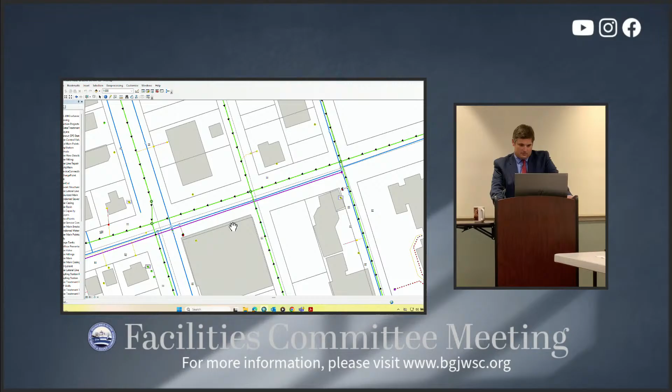And so that was... well, this isn't labeling. Where's my labels at? Stop that. Label. Okay, so 4,250 and 60 here. Let me turn on the orthos. Oh, stop that.

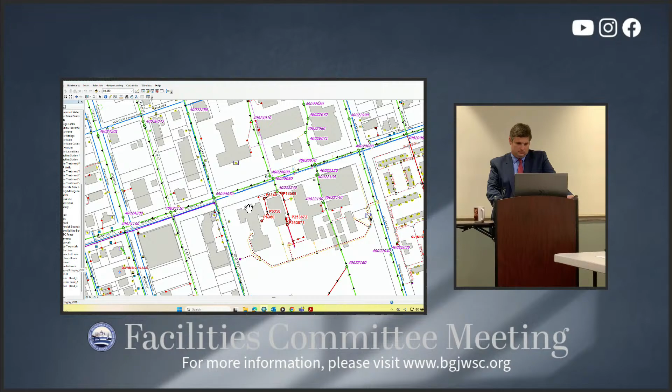Do you and other members of staff have confidence that they can do this? Yes, they can absolutely do the work. They've done a lot of high quality work for us over the years. They did a section of line over on Sea Palms West by 2032. They were there for months on end and got that job done. The work can be done.

I think there's a combination of things. The lines are taking longer, and again, when you have to get them clean to the point where you can reinstate the laterals, it requires a higher level of cleaning, which does come at a risk. And I don't think they bid the job appropriately for that. So that's what I was going to ask. You think that they just underbid it because they didn't do the due diligence? I think that was a part of it. And also, when you're having to get multiple crews down here that you weren't planning on getting down here.

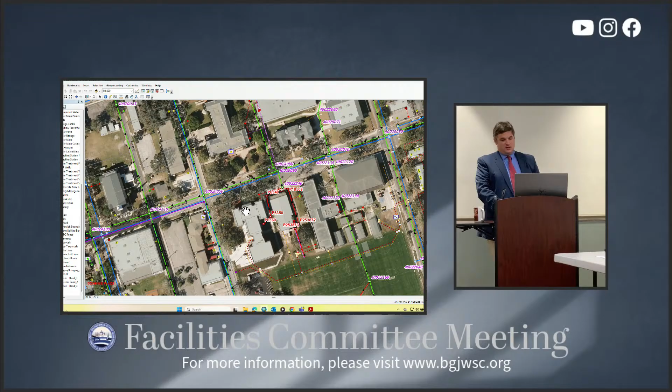So this line here is on Mansfield, 50 to 60. This is by Glynn Academy. So you've got these lines in this general area here. And what size are those? Those are, hang on, I think those are 24s, but they may be 15s.

And they set up bypass lines while they're doing this? Yes, because it takes 24 hours to rehab a line. So this is a 24-inch ductile iron line. And then, wrong one. And then, so the 15s are, let's see, 500 to 510, no, 2,500 to 2,510. So how many feet do they have left? If this is descoped, they've got about 3,000 feet left. If these are included, it's about 6,000 feet left. Out of how many feet? 26,000.

What's the life expectancy of those lines left? The rehab lines, you're looking at 50 to 100 years. The ones that are in bad shape now, we've talked about multiple ways of doing this. They do need to be rehabbed. They're in terrible shape. So we're either going to have to try to line them, and unfortunately you're looking at $200,000 to clean them to see if they're lineable, or you're digging and replacing. We talked about pipe bursting, but in downtown you have so many laterals, you're going to have to dig every single lateral if you pipe burst it, so you might as well just open cut it and dig it. It's going to be very costly to dig these lines because they're in the middle of asphalt.

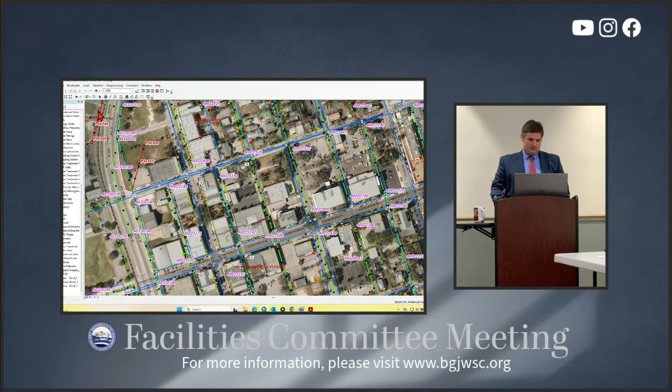This is Gloucester and Reynolds, and this area coming up F Street here. This is the court, all these lines by the Pate Building and the courthouse, those are the lines we're talking about. And you're not going in and digging and replacing it in one day.

But we had a unit price for them to do this work, and now they say they can't do it. They said the lines are not conducive to lining. They don't think they're in enough shape, good enough to actually line them. They're concerned, which I understand.

They're concerned that if they clean the tuberculation off enough that they can line it and reinstate the laterals, the pipes are going to collapse. If they don't collapse while cleaning it.

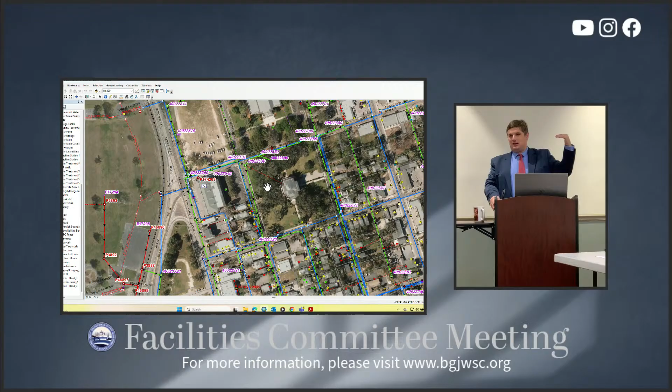Because a lot of these older lines, when they have major tuberculation, we'll just clean the flow line down, and it's not as big of a deal, because you're not messing with the top of the pipe too bad. But with those laterals coming in, and a lot of those old laterals downtown are coming in more, not at 9 o'clock, they're coming in at 10 or 11 o'clock. You got to get the whole pipe clean.

And when you start cleaning the top of the pipes, they're worried about sinkholes showing up and the collapse happening. If a collapse happens, it's not like it's going to cause a major issue as in sewer going everywhere. The pipe will still be flowing through the bottom. You're going to have a huge sinkhole open up, and you're going to have asphalt in the pipe and everything like that at that point.

You'll have to bypass it, dig it at that point, and you'll have paid $100,000 or $200,000 for them to clean it, only to have to dig it at a later date. Do they get paid if that happens? Yes, they get paid extra for that, don't they?

If it collapses, they have a point repair price, but the point repair price was not intended to replace manhole to manhole.

15 and 24-inch pipe's probably going to be somewhere in the ballpark of $300 to $400 a foot to install plus asphalt. So you're probably looking at somewhere around $500 a foot by the time you're out of that work. And $500 a foot at 3,000 feet, that's $1.5 million to replace these lines.

Are you saying to do a change order then for this, or bid it out separately? I think at this point in time, since we already have a contractor on site, he's gonna get 20% just doing a change order. He's gonna hire somebody to come and do a conventional dig or a pipe burst.

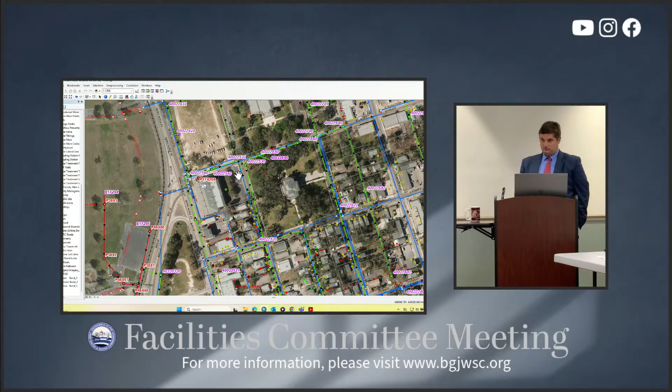And at this point, if you bring in an additional contractor, I think you'd be better off de-scoping this and rebidding. I agree. And what we could do, I'm not saying this is the ideal scenario, you could bid it, provide the videos and say, does anybody think you can clean and line these?

You could do that. You could bid it for pipe bursting and then just digging down on the individual laterals, or you could bid it as a full replacement and just get numbers on all three of them. I'm not saying it'd be ideal, but you'd have a comparison of all three options. You could bid it out and just see what you could get back.

Now, if we do have to dig down, whether it's laterals or the whole thing, some of these areas are going to be very challenging to dig. If you're digging Reynolds Street between the Pate Building and the courthouse, there is no good time to do that. The lines down Mansfield on Glynn Academy, you could do those during the summer. It won't be great, but you could handle those. But Reynolds Street between Pate and the courthouse never doesn't have traffic on it.

Not saying the county won't work with us on that, but it's going to cause major disruptions to county business when we do this project if we have to dig these lines. That's why we try to do them trenchlessly.

We can put that in the specifications so the contractor knows he will have to work within the county schedule. There might be certain days they can't work. The only days it makes sense for them to work are Saturday and Sunday down there, and if you're only doing it two days a week, it's going to take months to get these lines done.

So the smaller pump, when we talk about a jockey pump scenario, the smaller pump will run almost continuously without cutting off. The larger pumps will come on, they'll run at least once a day to make sure they're going to fire, but they only come on when we get to a certain level in the station.

So 2030 is back here on Stranger Cemetery Road. Do we have a picture of that station? Yes, hang on, there's a hyperlink. I don't know how to get to the hyperlink. It's outside, above ground. You know where that one is, Mike? Yes, sir, right next to the one I rehabbed in 2016. Okay, so you know what they're talking about.

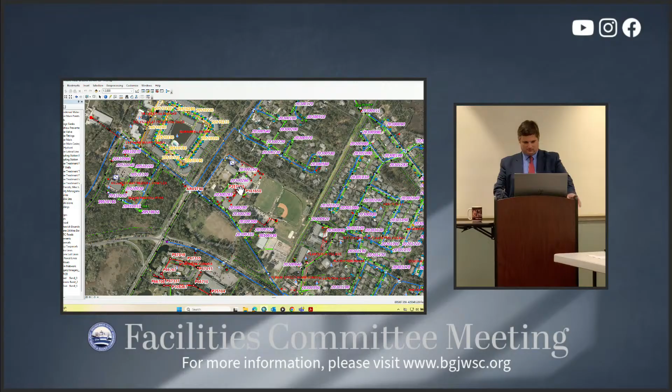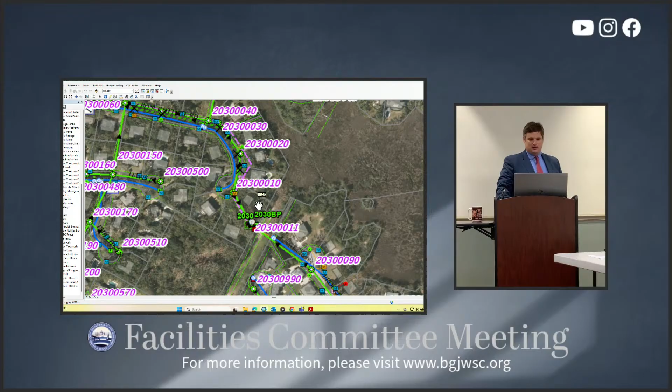Matter of fact, I think I raised the question about the pumps at that time. So 2030 is back here at the back of Hamilton Landing on Stranger Cemetery Road, back behind the Georgia Power easement.

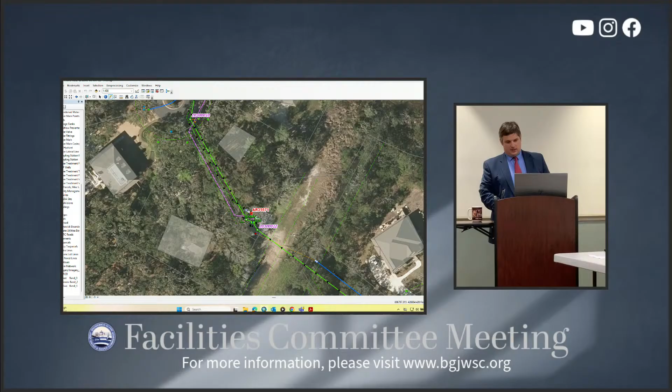What happened to those pumps? What caused the problem? Those pumps are having a lot of motor issues, and we think it's because they're starting so much, particularly in the middle of the night. They'll come on, ramp up, and immediately cut off because they overpump in the middle of the night. So we have 3 of the 4 pumps out of the hole right now needing repair.

Could you change that to a timer at certain times of the day? That wouldn't do it? Operated at different levels depending on time of day? I mean, you could, but then when it started raining, you'd have real problems. But have it override if it... I will say this, anything is possible, but the more complicated you make it, the more failure points you have.

So we have 3 pumps out. There is a bypass pump there, a permanent bypass pump, and one in the hole, so we're not having problems at the station. But to rehab the 3 pumps is going to be $45,897. And to buy 2 KSBs for the primary, the larger pumps from Pump and Process, and 2 jockey pumps, the smaller pumps from Sulzer, is $27,933 for the KSB, $18,687 for the Sulzer. So you're essentially spending the same money to buy 4 new pumps as to rehab 3 pumps.

So the request here is to buy 1 pump for 2003 from KSB, 2 pumps for 2030 from KSB, 2 pumps for 2030 from Sulzer, and 1 pump for 4119 from Sulzer. And the total is $78,901 to Pump and Process and $51,697.50 from Hydra Service. We can certainly go through the repair quotes and look at pump curves should you like to.

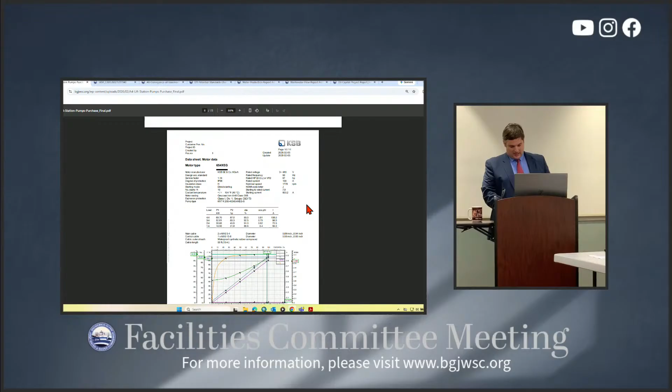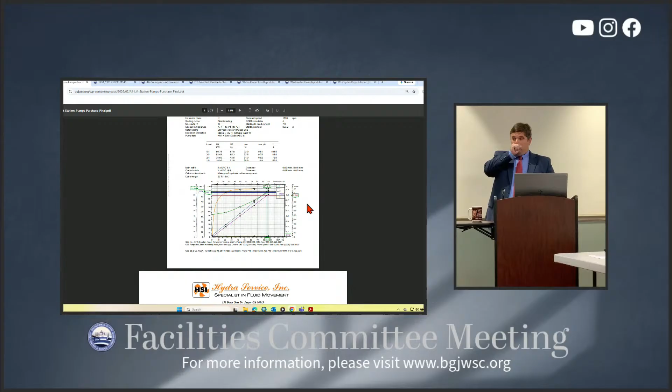So we're replacing all of the pumps in 2003? In 2030, not in 2003 — replacing 1 pump in 2003, all of them in 2030. 2030 is the one behind Frederica Academy. It's 5 years old. 2016, it's 10 years old.

Time flies. Believe me, I have an 8-year-old, I understand, time flies. She's supposed to be like 4.

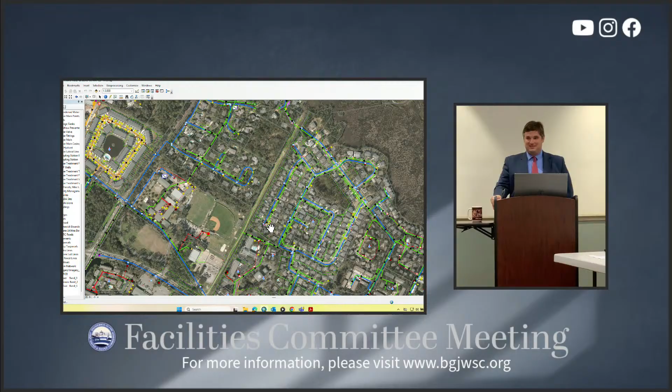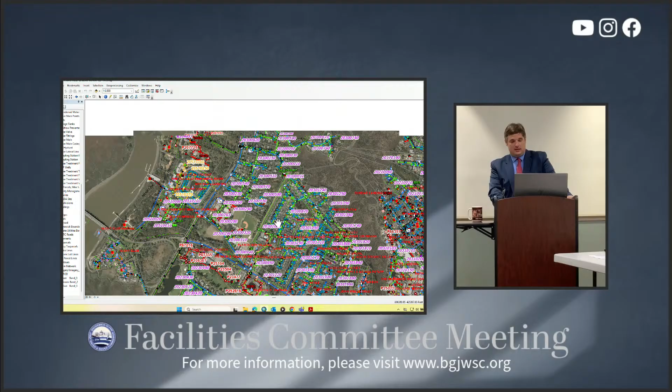The pump should last 15 years. They should, yes, sir, and none of these pumps have. They were Flygts that were in the 2030, and they have not worked out. The Wilos that were in 4119, one of them is being replaced. We're not really buying any more Wilos right now. And then the Grundfos we put in 2003, we probably won't be buying a whole lot more of those either. So we're trying to shrink down on what we're using. We tried some different pump manufacturers, and it hasn't worked out for us. Flygt, we do like their pumps, but their prices have just gotten uncompetitive.

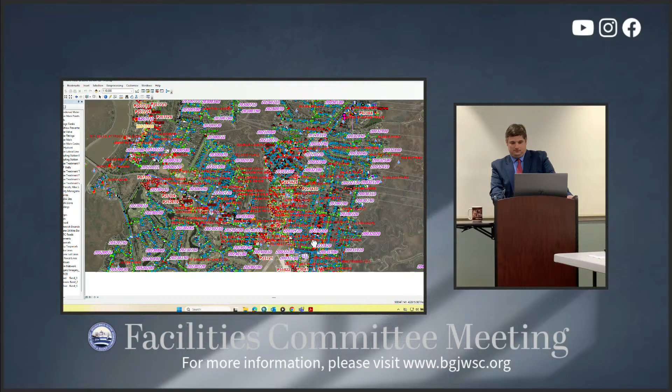So speaking as truly the only layman on this board, were the pumps under capacity? Or are there just faulty pumps, or?

Well, it depends on the situation. At 2003, the Grundfos, we have had repeated problems with the cables. The cable that comes into the top of the pump keeps having nicks and cuts. So there's got to be something with the way they're wrapping those cables that they're not durable enough for those setups. The Wilos, we're having motor problems, and the Flygts at 2030 are having motor problems. Typically, when you have motor problems, one of 2 things is happening: the pump's ragging up and pulling more amps causing motor problems, or — which is the case at 2030 — it's just starting and stopping so much. You don't want a pump to start too often because it's kind of like your vehicle; the more times you crank it, you're going to wear the starter out eventually.

Don't we have an elapsed time meter and all that in our records? We do, but I don't have that information right now. But we do have it to compare with other pump stations. Yes, sir, we have all the run times and everything like that. Yes, sir.

I mean, I can pull it up, well, I can't pull it up from here. I don't have the link. So if I could get David to send me the link, I can pull it up from here.

Did we have a motion yet?

So in 2030, though, we're talking about using two different size pump horsepowers to alleviate that problem. So the smaller pumps will basically run 24/7, except as part of the programming, we'll cut them off and start one of the bigger pumps, say once a day, to make sure that they're going to pump. It also helps flush everything if there were any velocity concerns. And then if it gets to a lag pump, it will turn on the higher pump and pump it down.

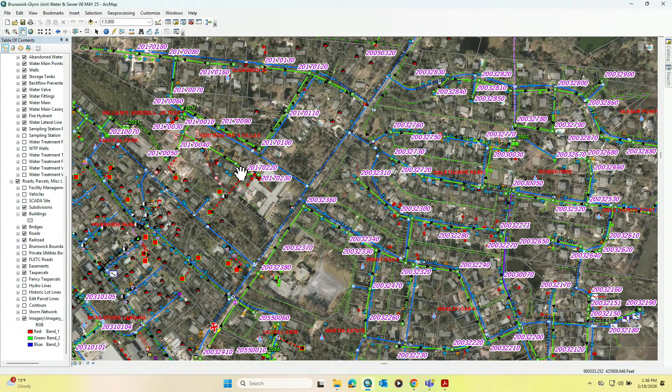No, we'd be better off to buy the new pumps. Yeah.

And Xylem has priced themselves right out of the market. We talked to them, indicated that they needed to sharpen their pencil, and they came back and it wasn't sharp enough.

You can typically buy two pumps from other people for what they're charging for one. KSB, Xylem, they're pretty comparable. And like I said, Sulzer, I used a lot of Sulzer pumps where I was at in Alabama. We've started putting them in our system. We've had good success with them. They're good pumps. Buford Jasper has started almost standardizing on Sulzer pumps as well.

So they are really taking a huge share of the marketplace. A lot of that's because they're a lot more competitive than Flygt has been, so a lot of people are turning away just because of the cost. And they're servicing their pumps there. They got a shop in Darien that can rehab the Sulzers. Hydro Services has got a place in Darien now, and we've been getting really good customer service out of them.

Can I have a motion? Yes, sir, I'll give you a motion for that one. And that's item number 4, lift station pumps purchase.

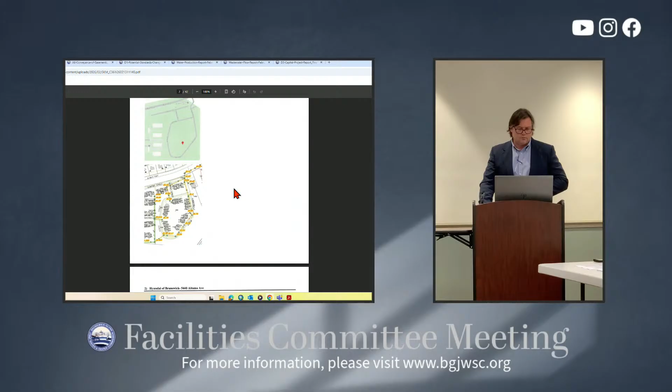Second item is off of Altama Avenue, Hyundai of Brunswick, a new facility there, auto dealership. On site, most of the infrastructure is privately owned and maintained, but there is an extension of sewer and also an extension of water across the fringe of their property, paralleling Altama, that we now have obtained or will obtain easements over as they work.

We got the dedication of the infrastructure last month, right? This is just the easement for Hyundai? This is easements, correct, easements.

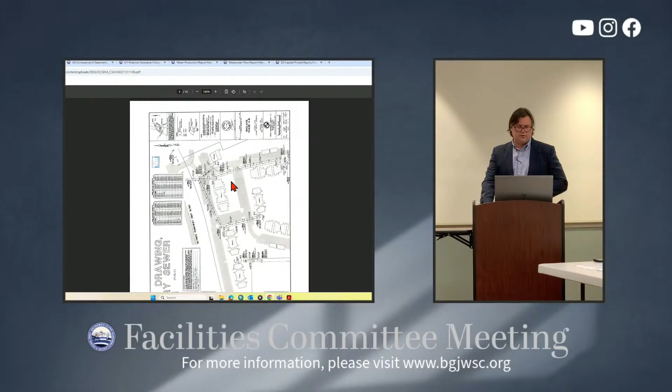Those are the two items. There are record drawings for each. Correct, so the infrastructure was already there within these easements, that's why we're getting these easements here, cleaning up our record, so to speak. It's not uncommon. We do have infrastructure out and about the county where we don't have an easement. One was never pursued for some reason, and this helps us clean this up. That's exactly what this is.

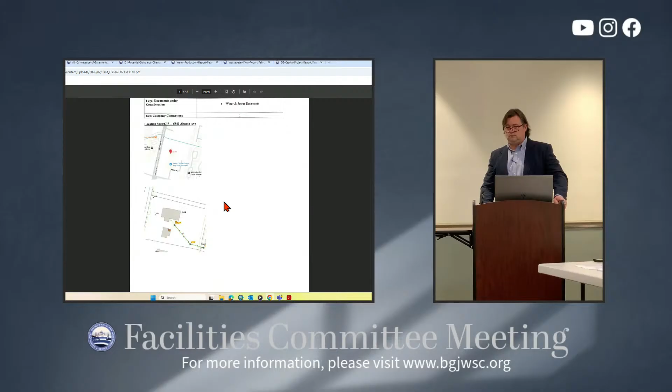Questions? Hearing none, can I have a motion? I move that the Facilities Committee recommend the full commission approve and accept these requests to accept infrastructure and easements with associated documentation as applicable. Second? I second. Motion seconded. All in favor? Motion carries 3-0. All right, thank you, Commissioners.

Todd, tell the commissioners what happens after we do that. It goes on our records, and the estimated cost goes into the financial statement, right? Yes, sir. It goes as a capital contribution on the balance sheet and then starts being depreciated. Right, correct. And legally, the next step once the Facilities Committee advances it to the full commission and they accept, we take these documents and have them recorded at the courthouse. Then once that happens, we bring them back and update our mapping in GIS so that everybody, including anybody who looks at the county's website for GIS or QPublic, tax assessor, all these easements will now show up everywhere.

All right, thank you. And then legally, does that come off the tax digest? It does not? It may lower the value of the tax digest, but it doesn't come off because we're not full owners of the property. Gotcha. Correct, yeah. Thank you.

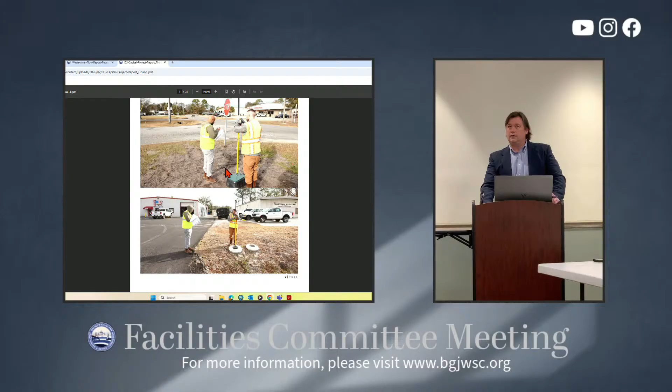Okay, all right. Let's see, I think we got a few overhead. How many people are tied onto that system now? We are working to get three actively tying on right now, but as far as who's discharged to us right this moment, nobody quite yet.

We've got one new development at Habersham, another electrical supply house over there, and one other interested party we're talking to, trying to get them tied in. Do we have grinder pumps in each one of those? They will have to have them, they got it first, they have to put them in, and they have to furnish the wet well for it and everything. Yes, sir.

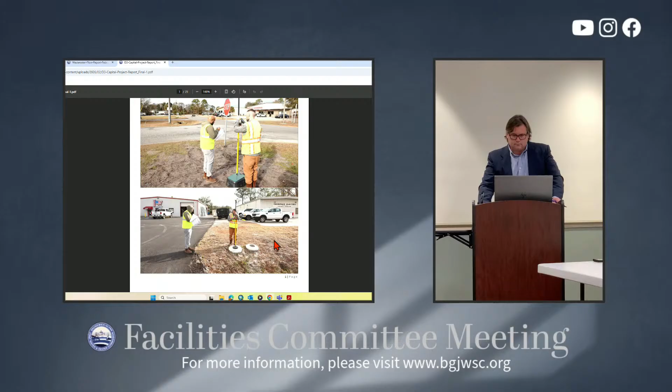All right, good overview shot there. Community Road area, lay down area. This is the section on Georgia Power's property, I believe.

That project's wrapping up. Getting that easement, if we're able to secure it from Georgia Power, saves us from having to bore underneath Community Road. We can go into what is an existing private leg of gravity that just serves Georgia Power but connects to our system on Benedict. We can pump into that system, take over that gravity section from Georgia Power, and then we don't have to bore under Community. So we might not get the full width easement we typically get, but it's a good concession to not have a line under Community.

This was a project you may recall that started out looking at doing gravity out here, and then it morphed into this in the design process. A lot of good ideas came about, some contractor driven, some opportunistic like the Georgia Power easement, different ways to make it a better project in the end. So I think we're in it with a really good product.

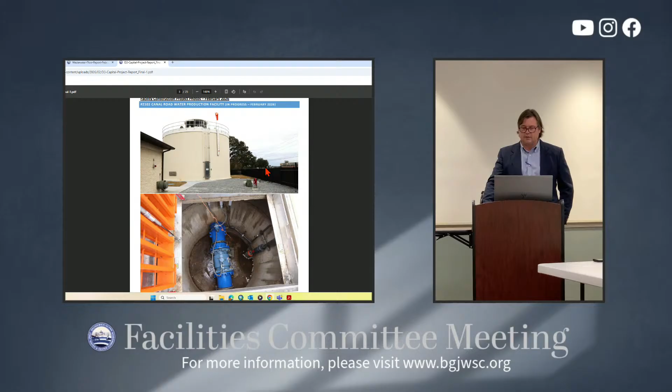If you've been out there in that area, Glynn County has their traffic circles complete now, working very well as far as I can tell. We are off to the side over there in the road. Harry Driggers, which once went right beside it, is now closed off, and there will be a deductive change order coming in March to close this project out, about $300,000.

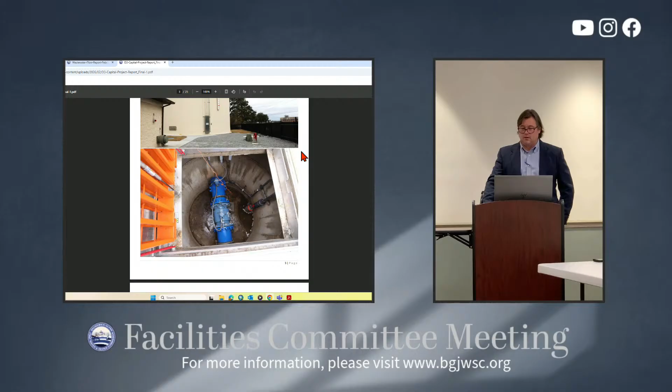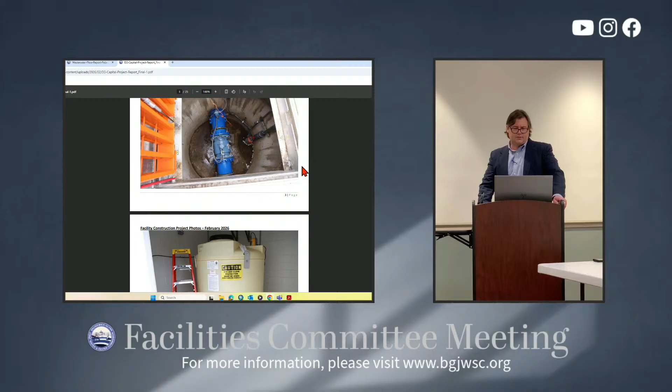Tells us how much water we're putting out to the system. Chemical feed tanks—that was one of the lingering items that finally got remedied there. There's a picture of it from the side looking at the hill behind it. But it's a nice looking facility.

Now functionally complete and just the paperwork. We do still need to get record drawings back from our engineer of record on this one, Thomas and Hutton. They're working on that, and then we'll close out the engineering contract as well.

I had no idea they were gonna wrap Harry Driggers around that from the roundabout, but it looks good. Well, it was interesting—we were doing this project, and the county was doing their major project out there. Nobody knew we had anything going on because the county had everything graded out, and we were just in there kind of doing our thing quietly. Then all of a sudden the tank started being built, and they're like, 'What do y'all got going on over there?' It's a good thing we got a private road. Yes, we have a private entrance, plus we got good visibility.

All right, next project is Dunbar Creek. We mentioned they got the pump skid started up. There's a few minor punch list items they got to get taken care of, most of those SCADA-related. Then we're trying to finish up the permitting—we got to have a public meeting for the EID, and then we'll get that closed out. But doing very well. You got a shot there.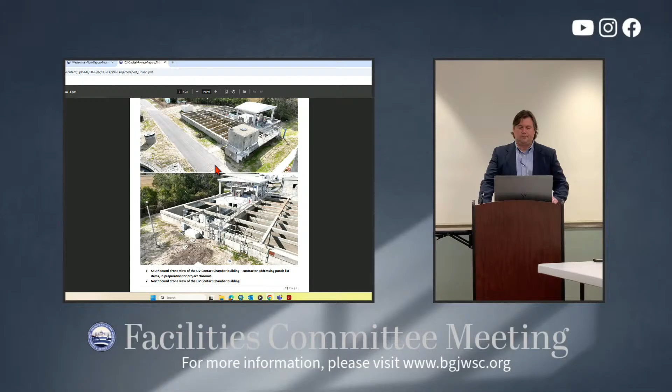So that one's almost off our list as well. The UV system is operating very, very well down there at this point. Good to see that project nearing completion as we're fixing to start another major project down there with the clarifiers.

All right, here we go—Exit 42 elevated storage tank. First picture here, you can see they used a lot of concrete placement. This is actually one of the testing protocols they do there, called a slump test. Pretty interesting.

That's gonna be visible then, won't it? Very visible. Can you explain a slump test to us? In the most simple terms, it's how watered down your concrete product is. There's an ideal water content depending on what you're doing with your concrete and the type of mixture. The sloppier the concrete, the lower it's gonna slough down; the less water there is, the stiffer it's gonna be. When they turn and invert that cone out, they see how it literally slumps down. It's a very simple measurement, but it gives an indication of how watered down the concrete mixture is.

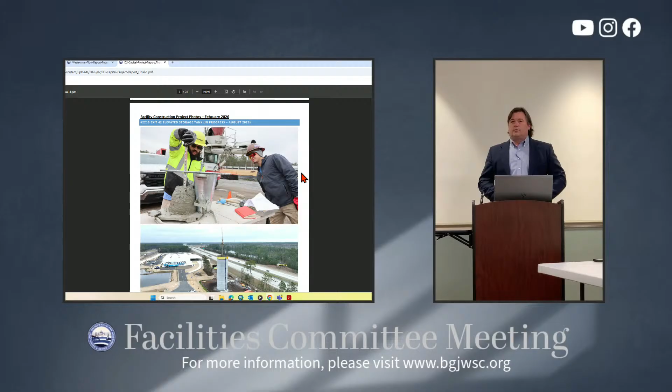But yes, to your point, sir, it is highly visible right there where they're working because the adjacent properties have certainly increased the visibility of our site as a result. And everybody, of course, is looking at our beautiful elevated storage tank and not at Buc-ee's as they drive by.

Exactly. They're looking at our tank, I'm sure.

It's real accessible. The roadway here, if you go out that way and come down the exit, cross 99, this is all open public right of way now. I think Glynn County is going through the process of accepting this publicly, but it's all open right now.

You can drive right up here if you like. Buc-ee's has that exit now sign. They do? We could change that and just put an arrow and say 'new water tower' with an arrow going over. That's right.

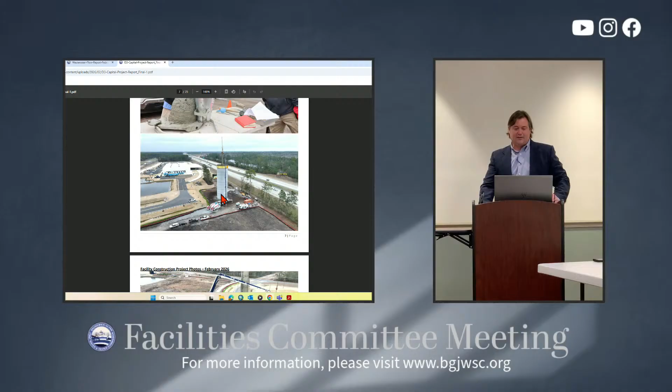So, very visible, and we'll talk about another one here in a second. There's a good view from there of placing concrete.

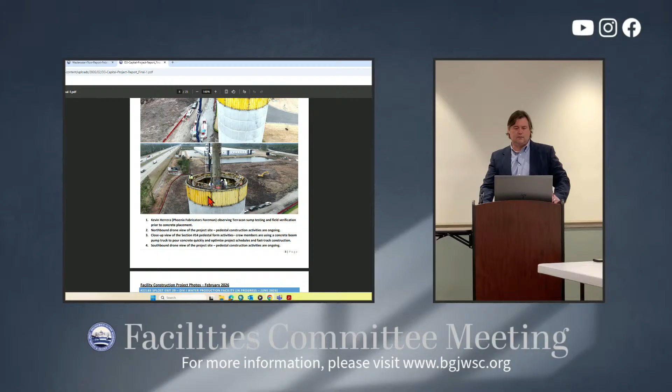The forms, you can see the yellow forms. One difference you'll see between this exit 42 concrete finish and the one down at exit 29 is that it's different.

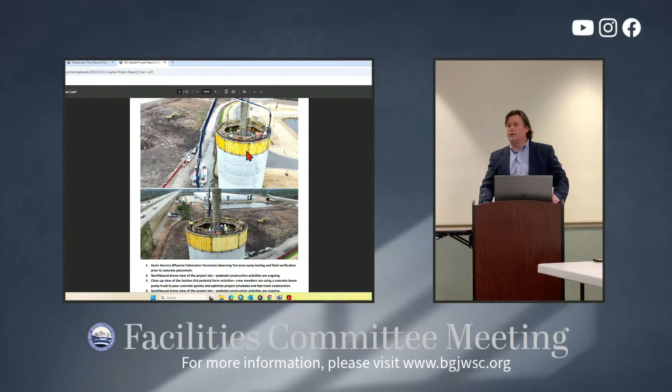They're using steel forms here, so the finish is very smooth, it's slick. The one down at exit 29 they're using plywood or wood forms, which gives a little bit rougher finish. Neither one's better than the other, it's just interesting that it gives a different finish.

All right, now down to exit 29, Division 1 Water Production Facility at our Southport Treatment Plant. That's the entrance road going into the plant site. You can see the new elevated storage tank there in the distance.

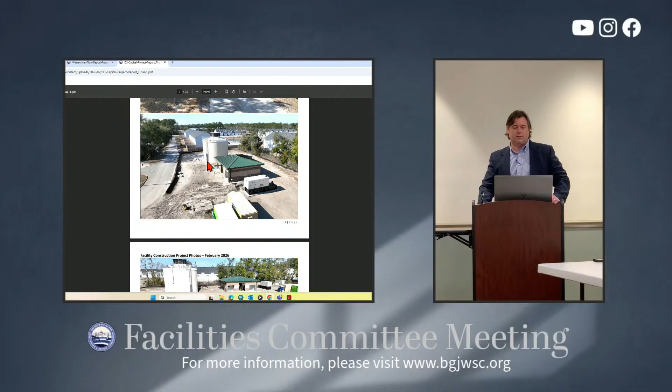Here's a view looking back to the west of the site. The green roof there is our new water production facility, with the generator sitting beside it and the ground storage tank in the background. Coming along nicely there. Another shot facing northward.

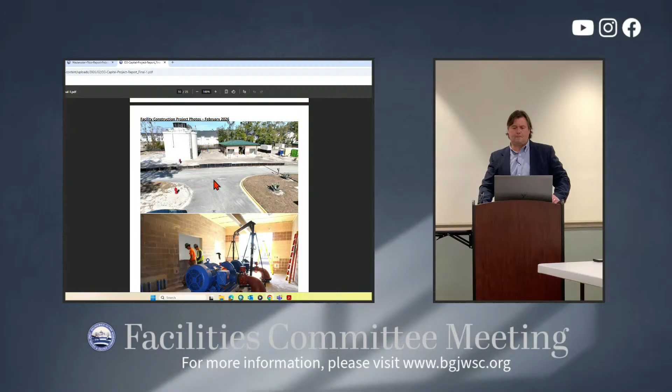That's inside the water production facility with the high service pumps. Typically you'll have two pumps in there, high service pumps.

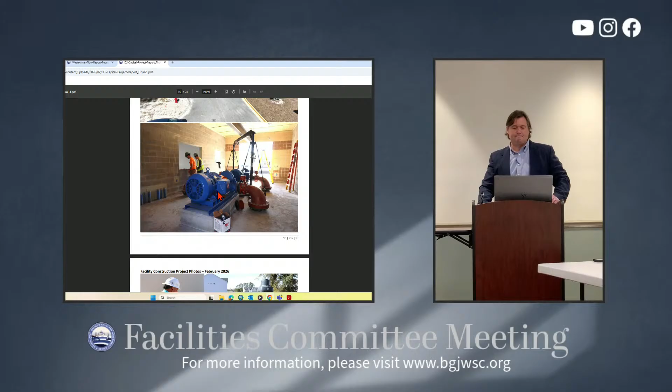Site Superintendent Mr. Art there, making sure everything's going fine with the connection to the existing well. Just a reminder, we did reuse an existing well there. The well was in good condition.

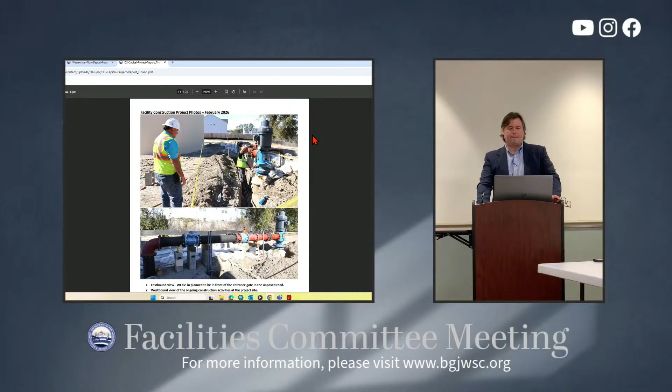Division 2 of the Exit 29 improvements. Just a reminder, that project and the next two projects are all SPLOST funded, so all that Exit 29 work is funded through the SPLOST referendum.

What about North Main? That's bond funded. Right. So, yeah, SPLOST for Exit 29, Division 2.

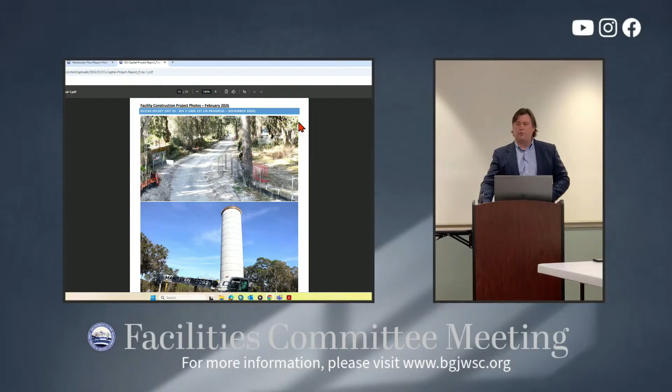It's our 500,000 gallon elevated storage tank, and that's the one poking up out of the trees you can see. You can definitely see it coming on the interstate, especially when the crane was on top.

The crane's been down for a bit because now they're placing concrete for the dome, or the cap, the support for the bowl at the bottom. I enjoy this view every morning as I come into work on Highway 17 across the Little Satilla River.

I can see beautiful tanks sticking up out of the trees now, it's just a landmark. Once we see the bowl on there, it'll of course be even more prominent.

And what are we going to use the concrete area for, since there's no water in that? Right, there'll only be some pipes going up through it, so what are we going to do with the space at the base of both of those tanks?

We don't have anything specific outlined, but our other pedestal and composite tanks end up being storage areas. We house the electronics and stuff for the tank inside those as well, but we also use them for general storage. You just can't store anything that contains fuel in the tanks, but everything else is good to go.

And you never have enough storage.

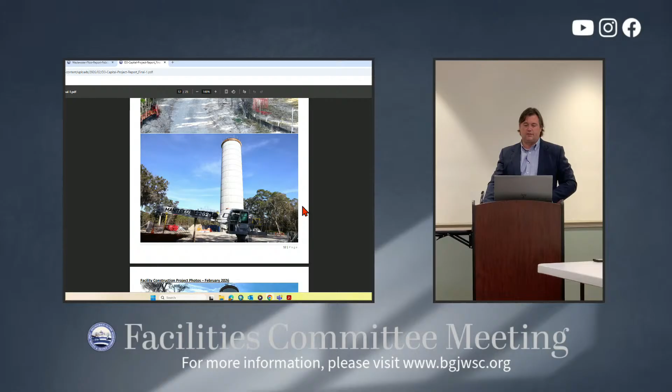Yeah, each one will have a roll-up or garage door at the base of it. I'm going to put myself a cot in there for storm season. That'd be good, it's right around the corner. Exactly, close enough by the house. It'd be nice.

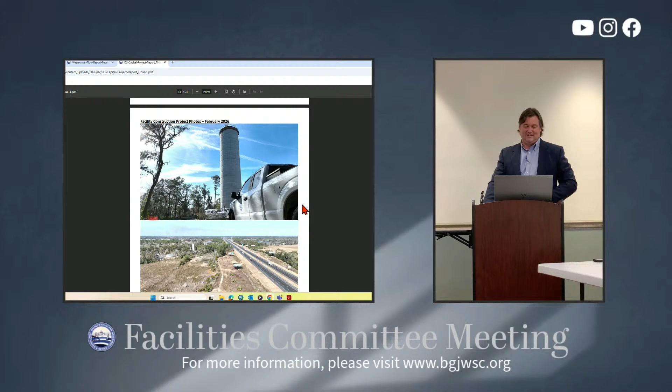Another good view there, and here's a UAV view. Basically you're looking directly below the drone. Here is the Little Satilla River facing northward, where our outfall to the plant is, and you can look forward and see the tank peeking out from behind the trees as well.

When that bowl gets on there, it's going to be about 170 plus feet tall total, so it'll be a lot taller once it's complete. Which one's going to be taller, that one or the other one?

They're essentially about the same, though of course the overflow elevations were a little bit different. This one's based on the Brookman tank, which is about 10 miles to the west on Highway 82.

And the one up at Exit 42 is based on the Kate Road tank and the other tanks in the area, the North Mainland tanks as well. So, very similar, all around about 170 plus feet tall.

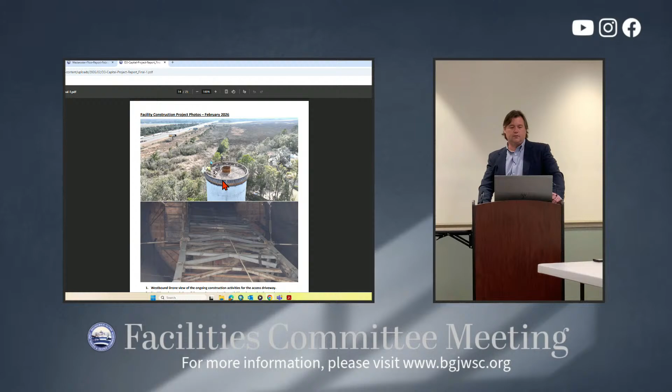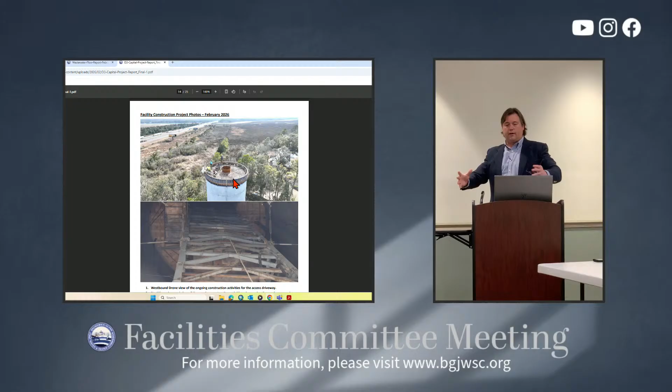There you go, and there's another good view from the top as they're placing the reinforcement for that dome cap we talked about. They are going to cap it with concrete, and then they'll start placing the prefabricated and formed steel, welding that in place. They'll start welding the bowl on the ground, then lift the whole thing up and weld it together.

Pretty interesting process here. It'd be good if we'd had a time-lapse construction photo. We talked about that, yeah. Could've done that, couldn't it, with the amount of photos we've got now? Staff has taken a ton of photos and video. We could piece something together.

It was talked about, should we have a post with a camera that takes a daily picture or something? Would've been nice, yeah. Trying to cut costs where I can, sir. Yeah, you said we can still do it. We can take and mock it. It won't be a daily picture, but we can get something close. There are some good videos on YouTube that do show time lapse. But they're not ours, no. Same style of tank though, and it shows a pretty good description of how they're built.

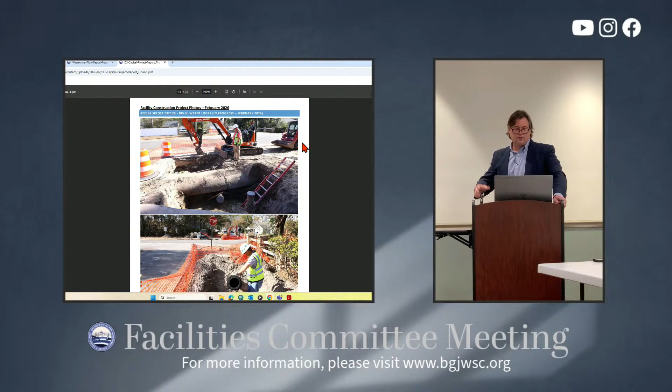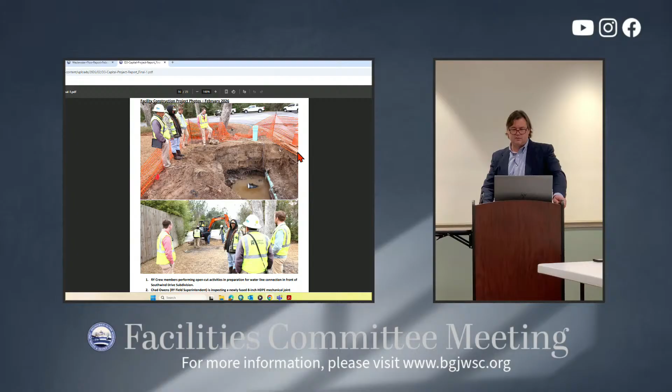All right, so Exit 29 SPLOST water project, Division 4. This is a water loop. There were several water loops down at the south end that we did make connections with, to help us get the most benefit out of that elevated storage and the new well site. Those are going in existing neighborhoods, cutting across Southport Parkway. There's always other utilities in the same area you have to avoid and work around, working back through neighborhoods and working with the neighbors. It's part of our daily routine.

Okay, smoke and dye testing. So that is wrapped up? All the smoke testing is, but I don't know if the dye testing is done or not, maybe another week or two on the dye testing itself. The smoke testing part is where they identified the defects, and now they're going back in with the post evaluation using dye testing. Say the smoke came out of the ground in an area and we don't really know where the defect is, they'll basically flood that area with water and dye, then pop all the adjacent manhole lids, watching for the dye to pop through. If they find it and it shows up, they'll poke the camera up in there and find exactly where it's coming down.

We're gonna get the report at the end of all the dye testing, then they'll compile all of it into a report for us. We have the active dashboard so we know where the defects are, but they'll compile it into one report at the end for both the mainland and the island. It won't be separate reports, it'll be one report for everything. We've got them for both systems now. All the smoke testing portion is done, yes sir.

So we have something that would show us with a little dot where all the leaks are, right? All the leaks they found. Yes sir. We can pull up the dashboard, if you like, we can show it. Do you want me to do it now or finish the report? We can finish reporting and do it.

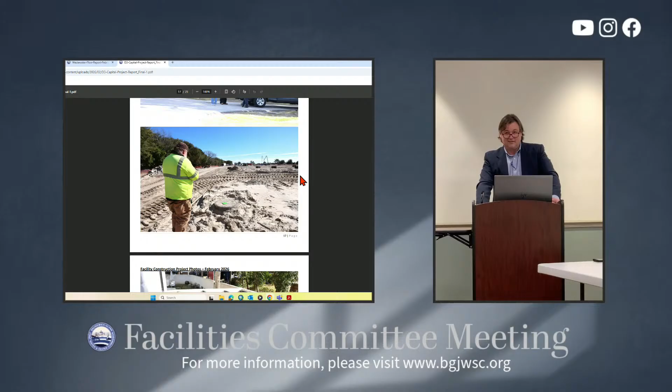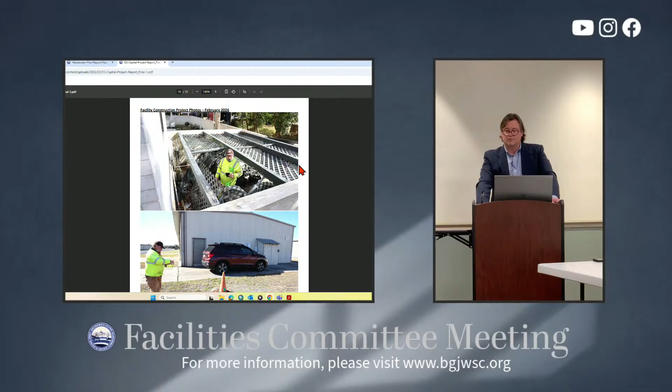So, ironically enough, smoke testing even identified some defects within construction zones. I won't tell who the owner of that construction site is, but it's very close to the beach, east of Ocean Boulevard, we'll put it that way. But I won't tell who it is. You never know where the smoke is gonna show up, showing a defect. This one actually is underneath a porch. This is something we frequently encounter, infrastructure built over the top of service lines and different things like that, so that smoke will find its way out.

Another defect they found there. Now, they didn't find a defect at joint water, I don't think. There's no sewer right there. I think they're just staging right there in front of our office. Now, I did see this one right here, witnessed this one myself.

This is out at exit 36, next to an event center type facility. It looks like an old grease trap that had been completely covered up. I don't think anybody even knew it was there anymore. But sure enough, smoke had come out of here, and then they went and flooded it with dye. It didn't end up being a large defect, but it was simply coming out of the grease trap that needs to be repaired. So that's now handed over to pretreatment to handle with that customer.

There we go, another one. Got to witness this guy out here too, off of Perry Lane Road. You can see that's a pretty significant ditch that Mr. Bill's standing down in. It's a brick manhole, bricked up, and you can see a couple bricks missing. So when that ditch fills up - and that's actually a lot lower than the invert of the culvert here. The invert of the culvert's over here, and this defect is down probably 6-8 inches below.

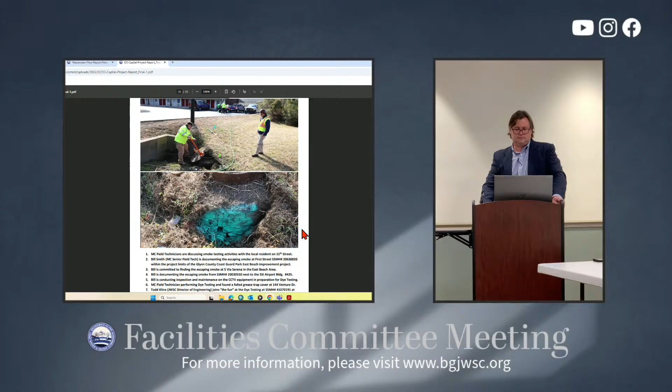Our construction crews are going now. A lot of those have been broken cleanouts and stuff. They're not all 200 gallons a minute or anything, but we're systematically going through trying to knock them out. We're going to schedule some video, in-house video after that. It'll be part of our normal 10-year schedule - we just rotate through the system and do it that way. But yes, sir, the system is routinely videoed.

All right, that concludes the pictures portion of the report. The detail and list of all our named capital projects is in the spreadsheet there with a lot more detail. Happy to answer any questions you may have. There is also our Gantt chart for timelines.

We do have out for advertisement right now, while he's getting to the smoke testing dashboard, two projects that we took and combined into one. It's a design build project to redo the water production SCADA, and 3 wells on St. Simons. As part of the master plan, it indicated the electrical systems were end of useful life. So we're combining redoing the SCADA and redoing the electrical on those 3 wells into one project.

Is that the only one we have? Those are due out on March 24th, I believe. So we should have those for hopefully a recommendation for you at the April meeting.

Harrington, Mallard, and Airport - yeah, and the airport will be going from 240 to 480 so that we can knock the amperage in half. Those are very big breakers right now.

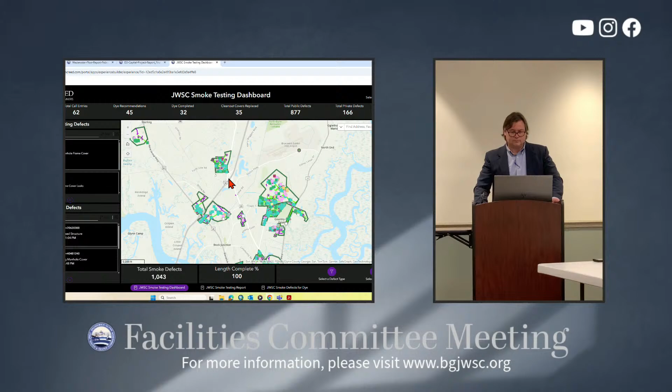Got a few more, 7 or so more to go. And critical defects, the 5 that Mr. Burrows mentioned also. Those critical defects were manhole covers that were just completely missing, known cross connections with the storm sewer - things like that, that are major contributors. One of them was listed as critical, not necessarily for I&I purposes, but for safety purposes. The manhole was all busted up and was unlevel, so we went ahead and got those taken care of.

Oh, cross connection, got it. We got one cross connection for sure. There's a couple that they identified as fissures, so they have smoke coming up in a drainage ditch - it's just not on a manhole or something like that. Those will be priorities for us to get corrected. But this one was a situation where it was clearly coming out of the actual storm inlet.

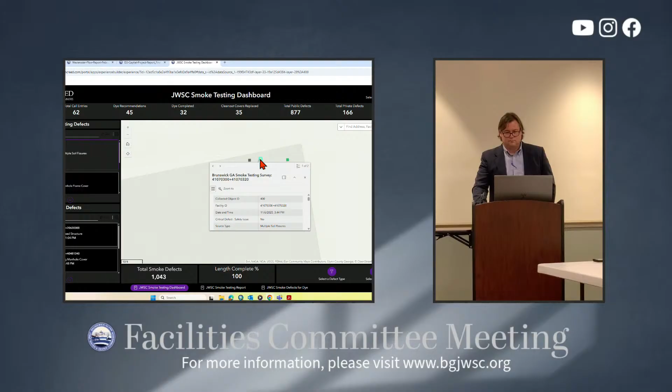Do we have the capability of doing smoke testing in-house too? We can do smoke testing in-house, but we're much slower at it than they are.

All right, so I don't think we have this on our website, do we? That's not - you gotta have a login to get to this. This was internal only.

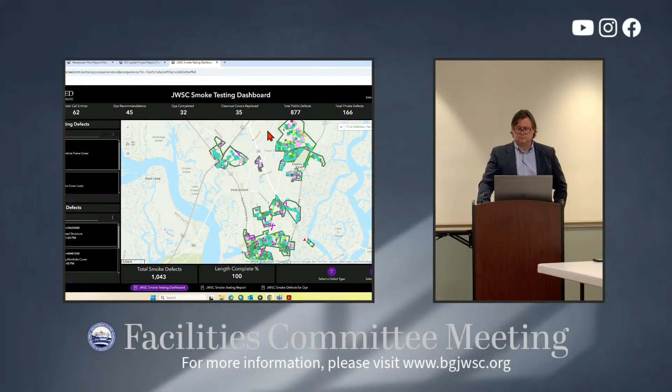But, you know, the bulk of the issues they found, to be expected, were manhole issues. Now, it does say there's 166 private defects. We will be sending letters to those customers requesting that they repair their private defects that are causing us I&I problems. Most of those are broken laterals in their yard that are draining water. If there was just a clean out cap that was missing, we just went ahead and screwed a new cap on for them while we were there.

So this is the FLETC campus. They went out there and looked around at numerous defects - one of the critical defects was a major manhole situation on FLETC. So they did smoke test out there, and they allowed us to do that. I picked the top 50 basins that showed an increase of rain event versus dry weather, so we smoke tested the top 50 basins.

People don't realize how old that infrastructure is either - a lot of that's World War II. There should be photos, there you go. So that's the collapse one that they indicated was getting I&I. If you click on the picture, it should get bigger. That is getting I&I, but that's obviously a potential safety hazard, so they deem that as critical.

And again, we're not going to say where this one is. We're not gonna say that. It may have been damaged during construction.

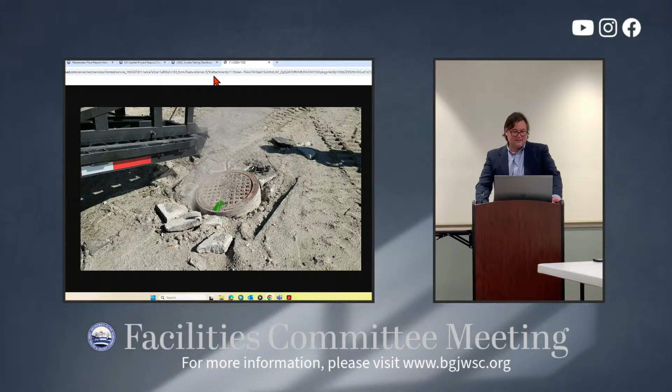Yeah, that's right. A couple of them we found - like I said, at exit 29, there was one manhole that did not have a lid on it at all. And it was on the east side of 17, which if you're on the east side of 17 near the port, it is wet over there. So getting a manhole cover replaced there will pay dividends when it does start raining again.

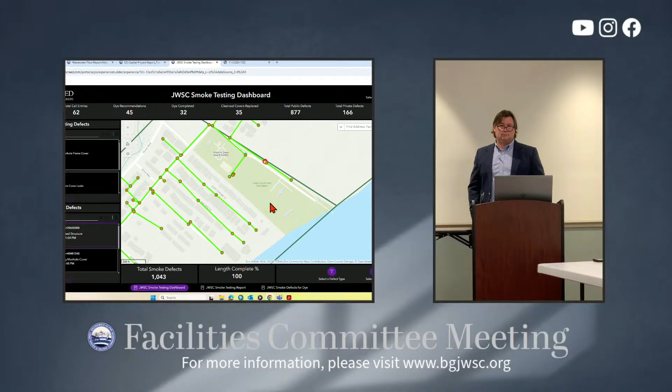We did have one known cross connection with a storm sewer on the mainland - I think it was a 4007 basin. And then one manhole cover at FLETC, and then a section of service that had no top of the pipe, and it was just open flow channel into there.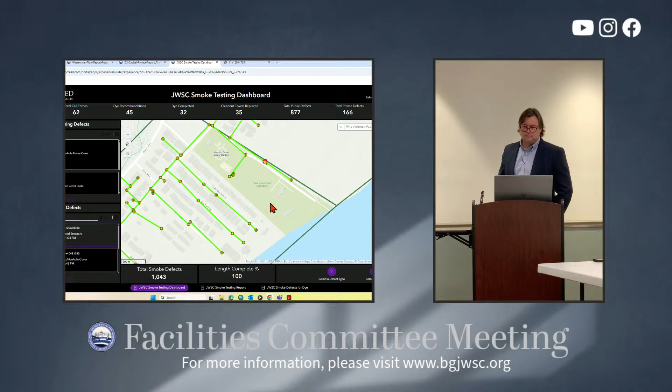Anything else? All right, thank you. We did not find any more 8-inch mains that were just draining water like we did a couple of years ago. If y'all remember, we were having issues around the hospital, and we found an 8-inch main that had been bored through - it was just straight pipe, 8-inch clean water coming into that station, and we couldn't ever find it. It was because it was subsurface, but we finally located it, so.